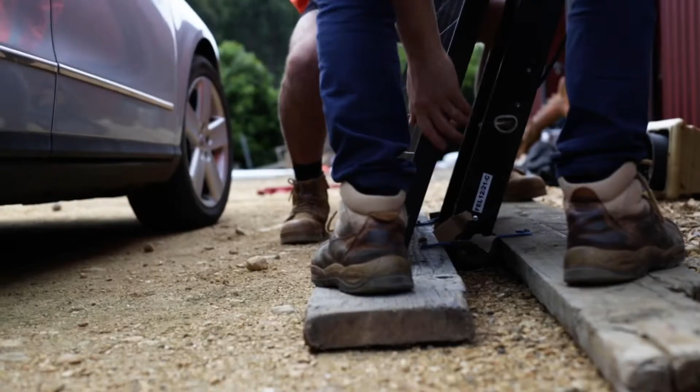We're talking commercial roofs, we're talking commercial solar, we're talking rail, perpendicular to the rib. How many feet do we use? Let's find out. Like in past presentations, we've looked at solar panel rail framing from the perspective of parallel to the rib and perpendicular. And we examined how to calculate the amount of rail and minimize wastage.

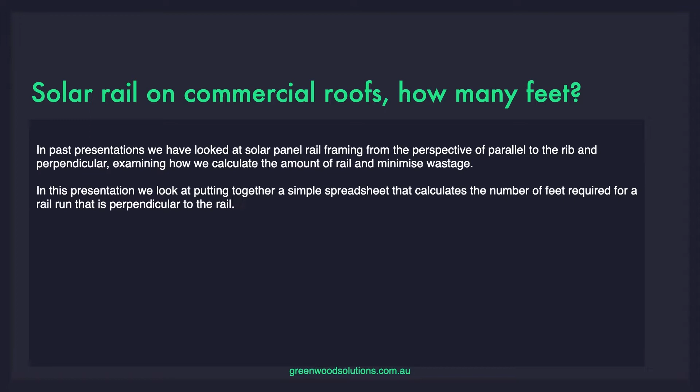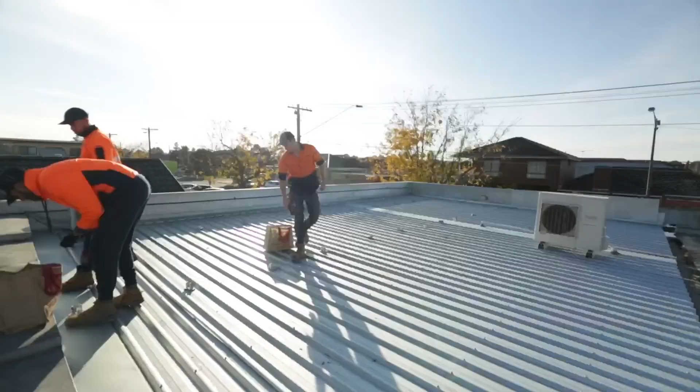And in this presentation, we're going to go a step further, and we're going to look at putting together a simple spreadsheet that calculates the number of feet required for a rail run that is perpendicular to the rib. Rail feet placing is determined by an engineering report based on wind loads, roof height and other criteria, and this determines max spacing. But when running rail perpendicular to the rib, the final spacing is determined by the space between the ribs, centre to centre.

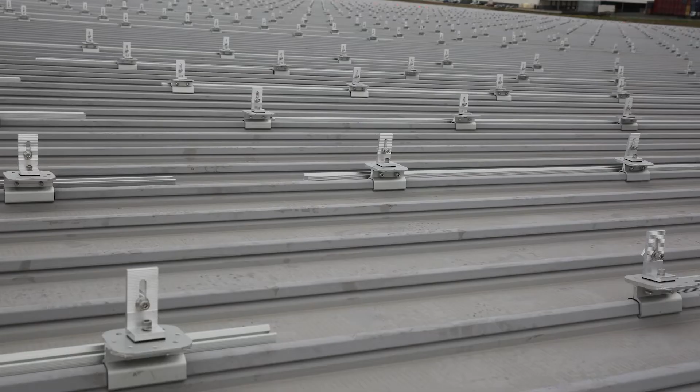Like all scenarios involving commercial solar calculations, got to make some assumptions, and these include the following. The spacing between the ribs, centre to centre, is 233.3 millimetres. Now, due to thermal expansion, the max unbroken length of rail is 30 metres. Now, when I say unbroken, I'm not including rail joiners. I'm saying an unbroken length of multiple rails joined together. So 30 metres. Calculations concerning actual rail lengths are already known, and we've covered this in previous presentations. The max spacing for the feet is determined by the engineer, and in this case they've said 1,000 mil for all the examples we're going to talk about.

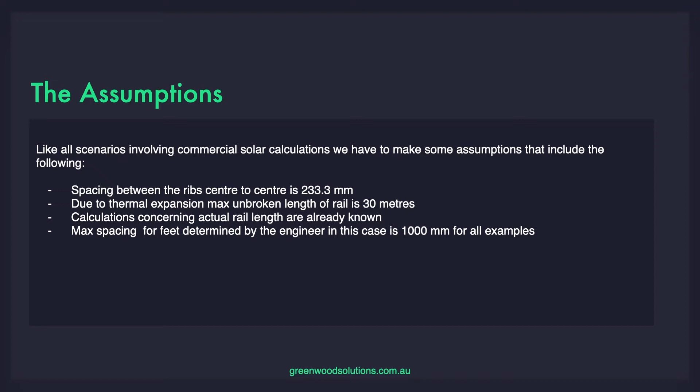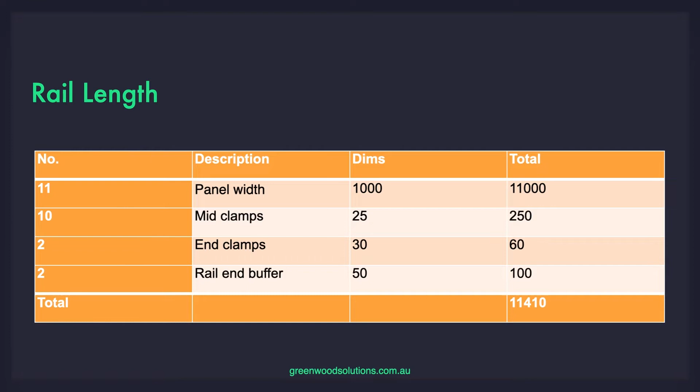Now in this table we're looking at rail length, the number of panels, the description and the dimension. So we've got 11 panels with a width of 1,000. We've got 10 mid clamps, 25 mil each. We've got 2 end clamps, obviously. We've got a rail end buffer, 50 mil both sides, and that comes up to, how good is your maths? A total of 11,410 millimetres.

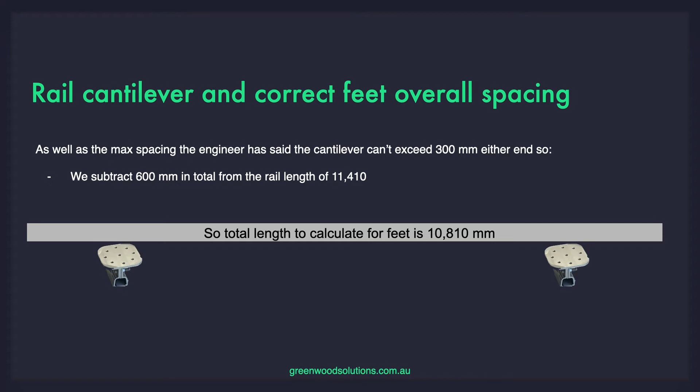Now, as well as the max spacing, the engineer has said the cantilever can't exceed 300 mil either side. So we've got to effectively subtract 600 mil in total from the rail length of 11,410. So we've got the rail length of 11,410 mil, remember? Cantilever is 300 mil both ends. Total length is 10,810 millimetres.

As well as the max spacing, the engineer has said, as mentioned before, that this cantilever can't exceed 300 mil either end. So as we have max feet spacing between the feet of 1,000 mil, we just divide 10,810 by 1,000 and we get a figure of 10.81. So the next step obviously is we have to round up. So we round up to 11 and then we add 1, of course, because we've been calculating the spaces. And to calculate the feet, you have to always add 1. So that means a total of 12 feet times 2, so top and bottom rail. So we're looking at 24 feet in entirety.

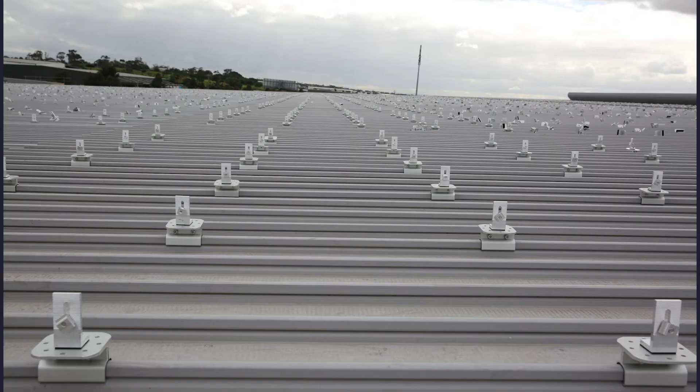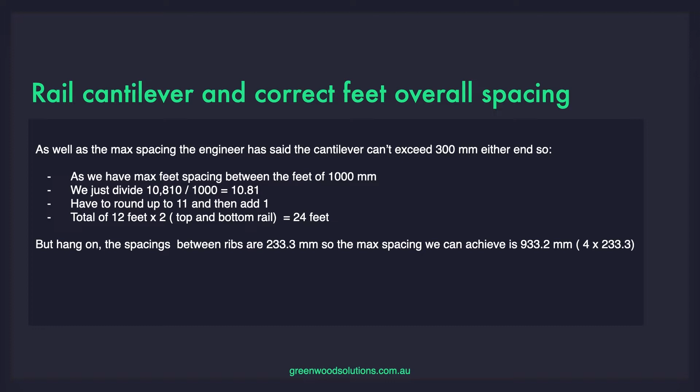But hang on, the spacing between the ribs is 233.3 millimetres. So the max spacing is determined by that rib spacing, and that is 933.2 millimetres, which equates to 4 times 233.3. So you can see what's happening. The engineer has said 1,000 mil max, but we haven't got increments on the ribs of 1 mil, so we can't get that exactly. Our increments are 233.3 millimetres, so we basically have to find a multiple of that increment that is less than 1,000, and that's incredibly important.

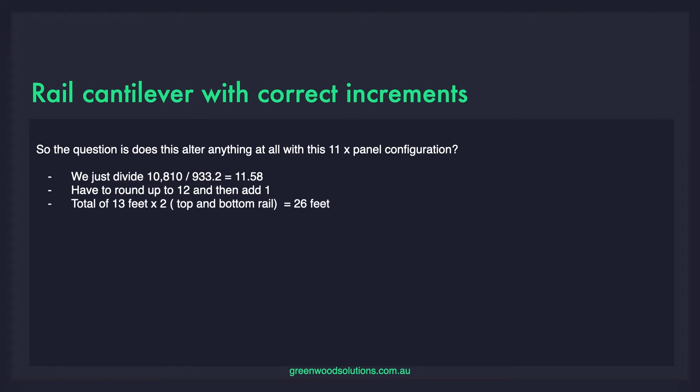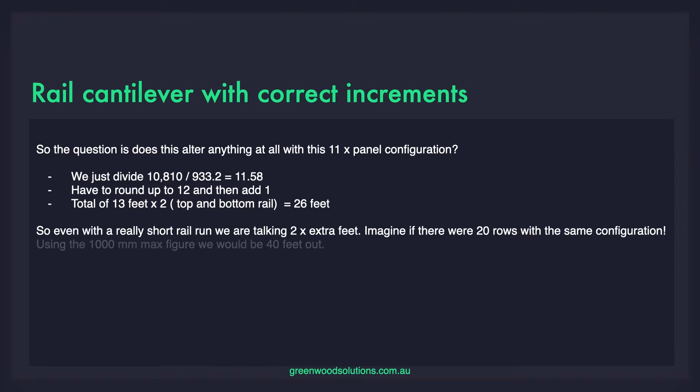So the question is, does this alter anything at all with this 11 panel configuration? So we get that figure of 10,810 mil and we divide by 933.2 and we get a figure of 11.58. So we have to round up to 12 and then we add 1. So now we've got a total of 13 feet times 2, top and bottom rail, 26 feet. So even with a really short rail run, we're talking 2 extra feet. So imagine if there were 20 rows with the same configuration. Using the 1,000 millimetre max figure, we would be 40 feet out.

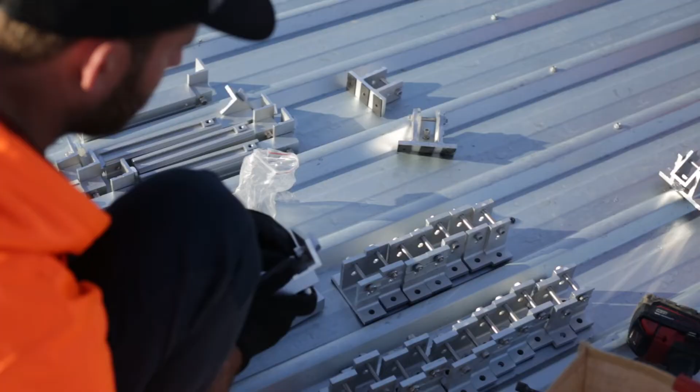Feet aren't that expensive, but waiting around for stock to be delivered that was not originally accounted for means potentially guys on site not having anything planned to do, and this trickles down. And you can imagine what this implies as well. So this is the kind of feet we're talking about here, and you can see how it actually works. So effectively it clamps on top of the rib.

Now if the rib was going from me towards the camera and your design was running the rail parallel to the rib, these would go like this. And that 1,000 millimetre increment, max feet spacing, would not be an issue, easy calculation. But because we're running it perpendicular, there's the next rib, there's another rib, there's another rib. So those distances between centre to centre on the ribs will determine our maximum spacing. In this case, in our example, it ended up being 933.2 millimetres.

We've been given a max cantilever 300 mil each side, but what happens when we use the correct rib spacing? So we look at our 11 panel example. We use a 933.2 millimeter increment. There's going to be 12 spaces. The total is 12 times 933.2. That's 11,198.4 millimeters. Look, the reality is 0.4 millimeters, and you're really not going to measure that out. But hey, that's the calculation.

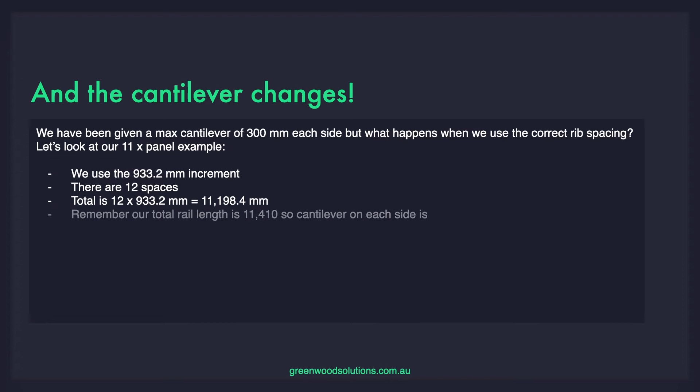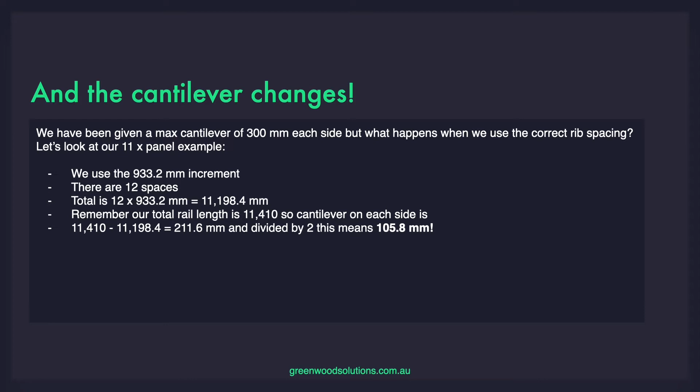So remember, our total rail length is 11,410. So the cantilever on each side is 11,410 minus 11,198.4 equals 211.6 millimetres. And divide this by 2 to get the cantilever on both ends. And this means the cantilever is now 105.8 millimeters. With this example, we know that feet are being placed every 933.2 millimeters, and this means feet are placed every 4 ribs. So this is easy from an install preparation point of view. But is this all? It sounds a bit too easy.

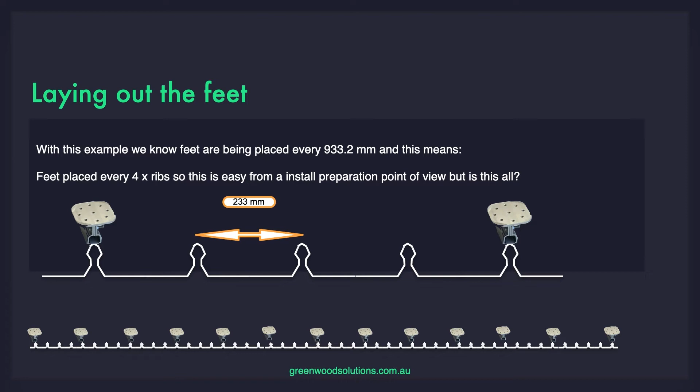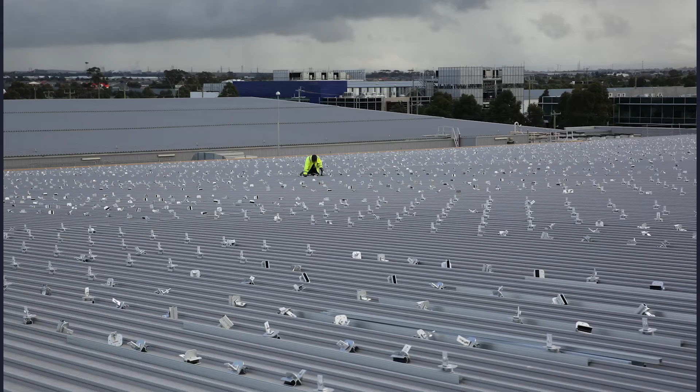So we've got 29 panels, and the total length, including mid-clamp spaces, end clamp spaces, and buffers, is 29,860 millimeters. And we just divide 29,860 millimeters minus the 600, so that's the max cantilever. And we divide that by 1,000 because that's the original, and we get 29.26. We have to round up to 30 and then add 1. That's a total of 31 feet times 2, top and bottom. You got 62 feet using the 1,000 millimeter increment.

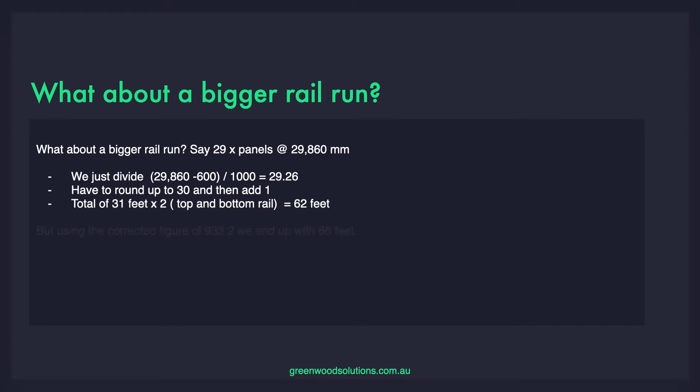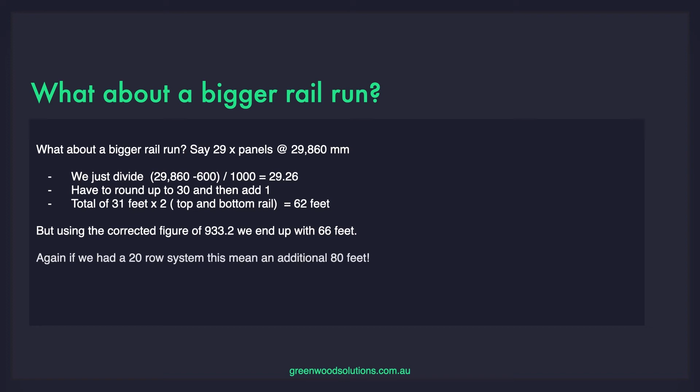But remember, we got these ribs. So by using the corrected figure of 933.2, we end up with 66 feet, and you can do the calculation yourself. Now, again, if we had a 20-row system, this means an additional 80 feet. Now, as I said, feet aren't particularly expensive, but if you don't have them on site, you have to organise. They have to be freighted to site. What are the guys doing? Is there a plan B? Is there a plan C and plan D? So that's all part of that project management brief that a good project manager will understand. But hey, you don't want to be in that situation in the first place. So make sure you do your calculations properly.

Now, with our 29 panel example, this starts to get a little complicated. With this particular table, just spend the time looking at the calculations and the cells that I've referenced. And if you need any help, just give us a yell. Now, as we were restricted to the distances between the ribs, achieving an equal cantilever both sides rarely occurs, as 1 extra foot is required to maintain the max engineered feet spacing. So in this example, our 29 panel scenario results in 33 feet for the top rail, which is a total length of 29,860 mil. Our feet spacing is again at 933.2 mil.

So let's have a look at the sums. We have 33 feet, but this means 32 spaces. So if we take 32 spaces and we multiply that by 933.2, we get 29,862.4 millimetres. This is 2.4 mil greater than the entire length. Okay, let's try 31 spaces. So we do that. 31 spaces times 933.2 equals 28,929.2 mil, which is 930.8 mil, so many numbers, for the cantilever.

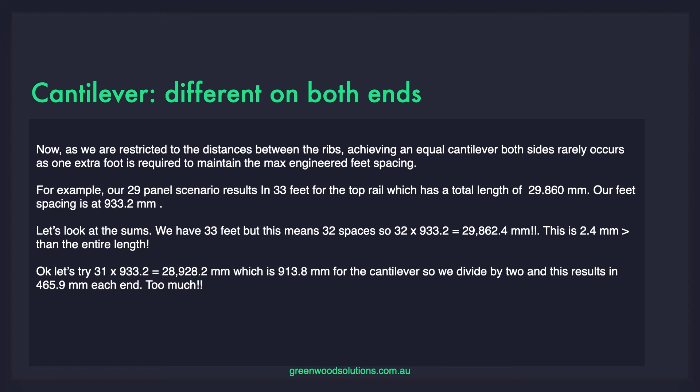And we divide this by 2 and the result is 465.4 millimetres each end. And that's too much, because what's the maximum cantilever that the engineer has stipulated? 300 mil both sides. So we've got to do something about that. Engineer has stipulated a max of 300 mil. And with the 31 space, 32 foot calculation, we've exceeded this, and that's why we need the extra foot.

So we can see that the last foot on the right hand side is not on the white line, which signifies the 933.2 increment. Our total rail length is 29,860 mil. Distance between the ribs is 233.3 mil. Max distance between the feet is 933.2 mil. 31 times 933.2 gives you a figure of 28,929.2 mil. The difference between 29,860 minus that

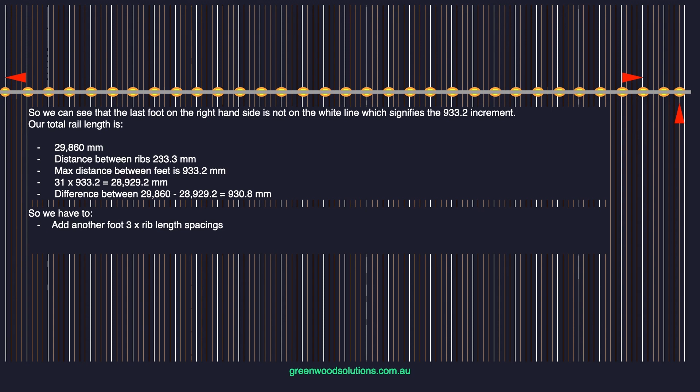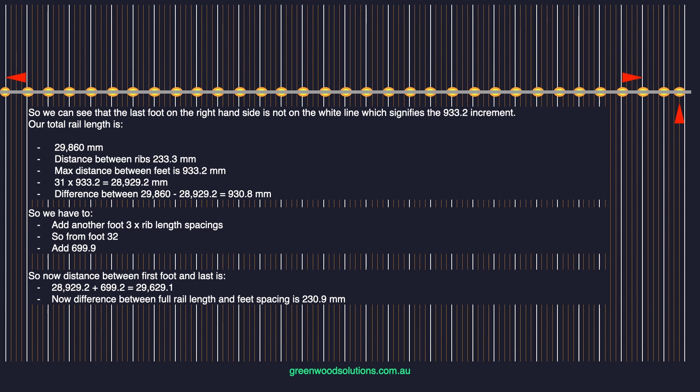28,929.2 is 930.8 mil. So we have to add another foot, and we have to add that 3 rib spacings away. So foot number 32, we add 699.9 mil. So now the distance between the first and last foot is 29,629.1. Now, the difference between the full rail length and feet spacing is 230.9 millimetres.

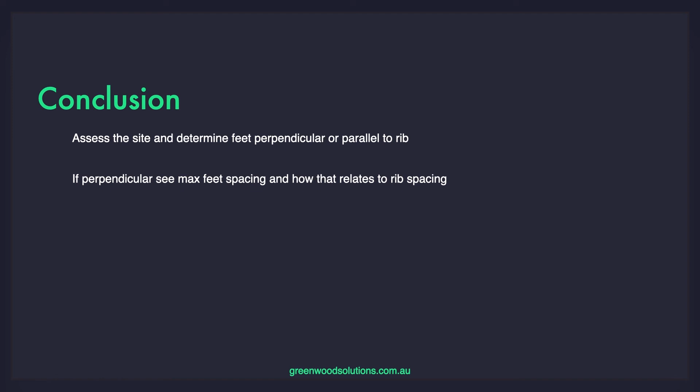Conclusion. So obviously you have to assess the site and determine if the feet are going perpendicular or parallel to the rib. If perpendicular, you have to look at the max feet spacing and how they relate to the rib spacing. Make sure your feet spacing does not exceed the max engineering stipulation. And you've got to prepare site drawings so all involved understand the design and what they need to do, and I can't stress that enough.